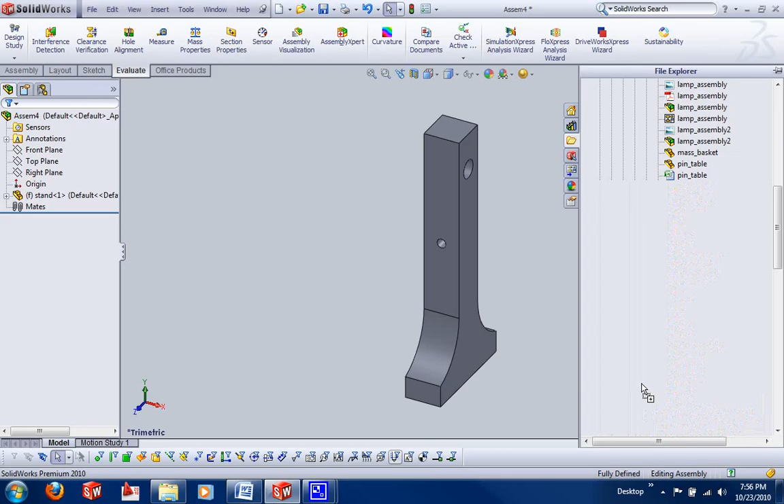I'm going to drag in the support, and I'm just going to hold control down and click and drag to get another support. I'm going to also drag in the pin table, and for the first one, I'm going to choose pin 4.

Then I'm going to hold control down, copy this over a couple times, because I'm also going to need a pin 5 and a pin 7.

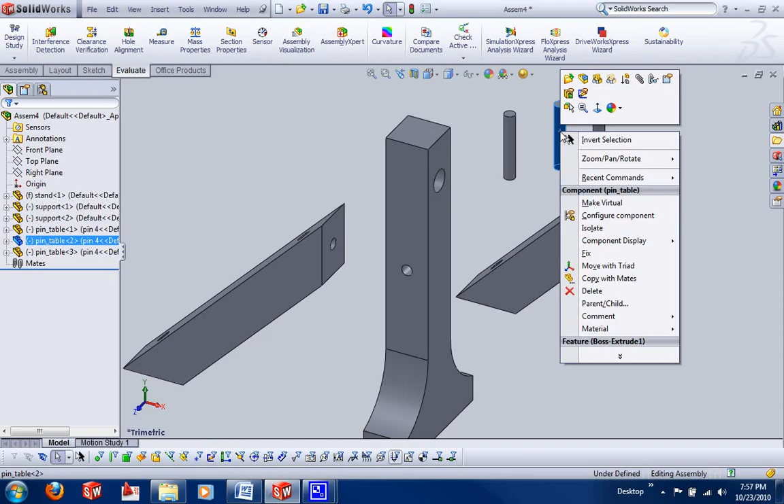So what I'm going to do is right click on the second one, go to component properties, and change this to the pin 5 configuration. I'm going to do the same for this one, but call out the pin 7.

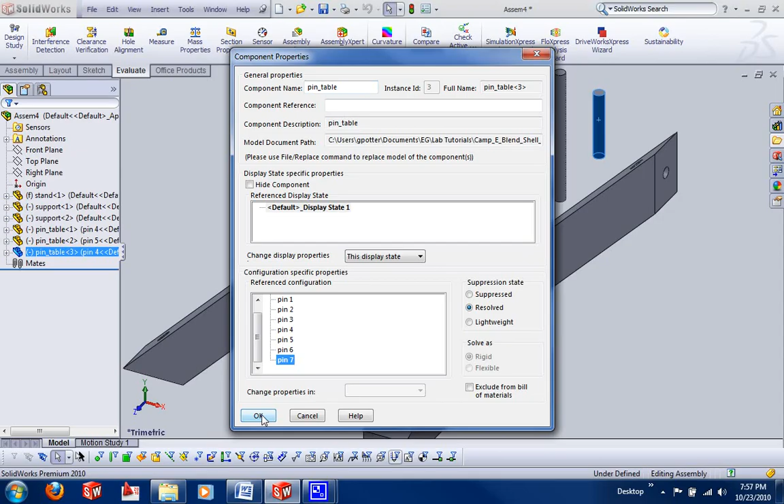So we've got 4, 5, and 7. We need 2 of 4 and 2 of 7, and I'm just using control to copy it.

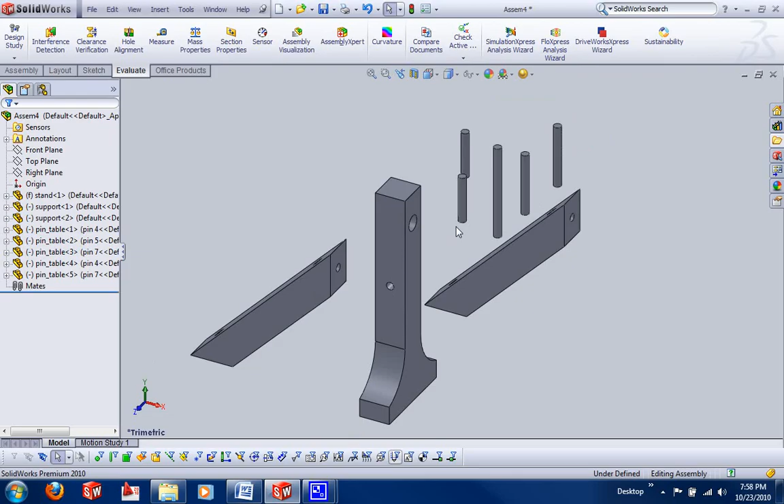Now we can start assembling everything. I assume there's some assembly knowledge you've already acquired, so all I'm doing is just mating it together.

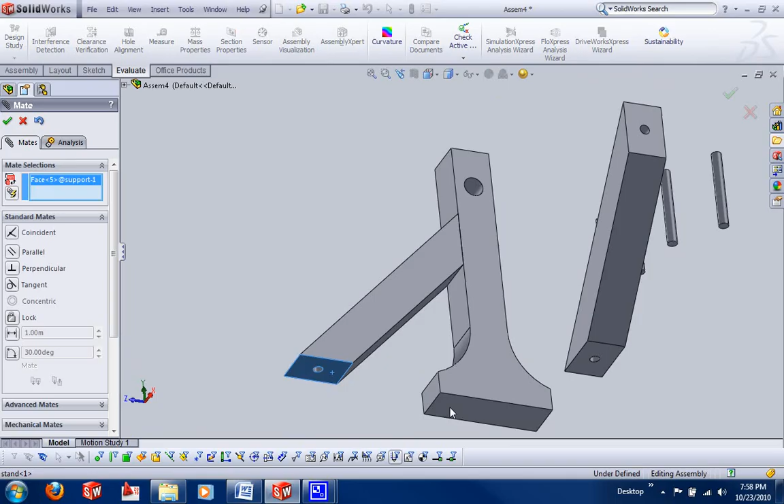These are just a lot of coincident mates, that's all it is.

Now I'm going to start putting my pins in, and I'm going to start with the long one here. I want it to be perfectly centered in there, so I'm going to go to advanced mates, and I'm going to choose width.

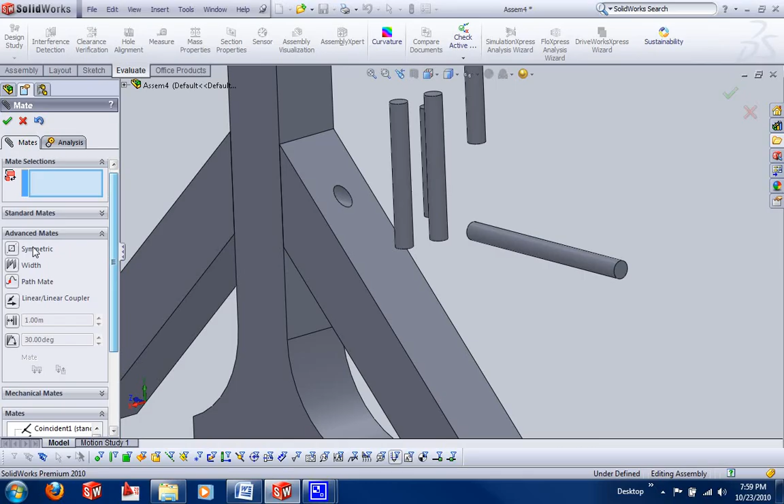I'm going to choose both ends, and then I'm going to come over here and choose both sides of the stand.

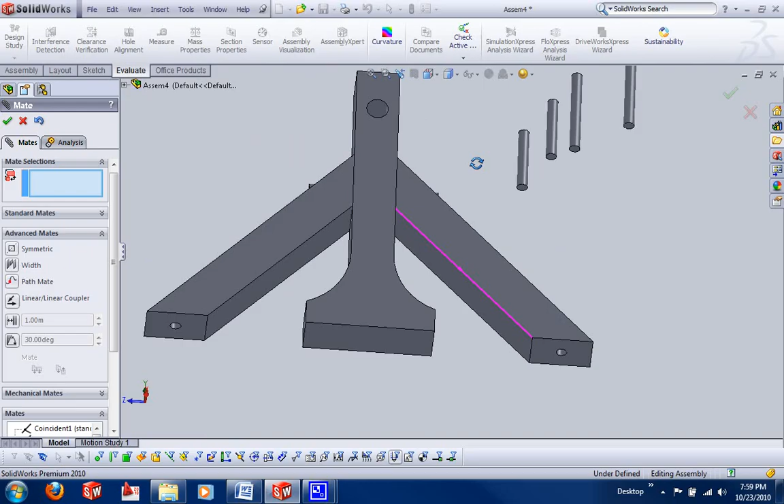Now the rest of them are going to go here. You can see I've forgotten the holes for the pins in the pivot stand.

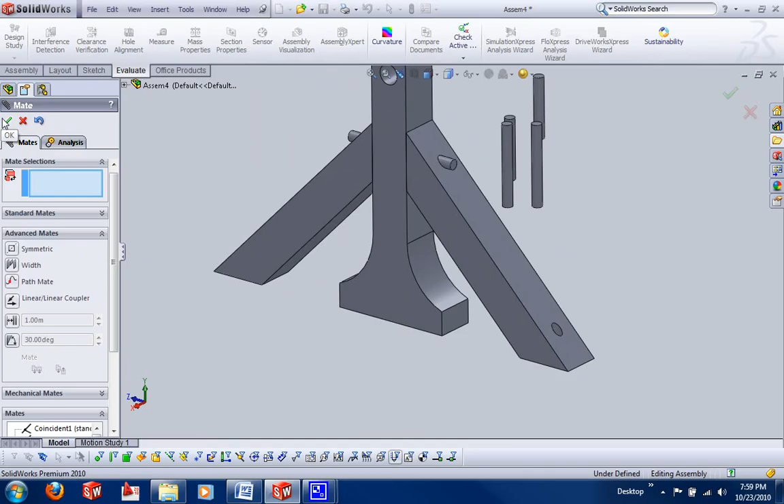So here's what we're going to do. We are going to right click the part, and we're going to say edit part, and it's asking me to save the assembly to continue, so I'll go ahead and do that.

I'll save it under Camp F, under pivot stand assembly.

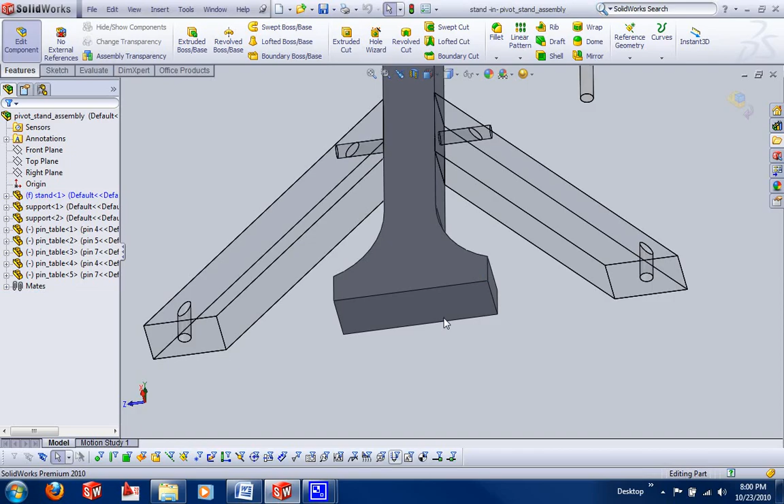So now I'm actually editing just the stand. So I can start a sketch, go normal.

Select both circles and make them equal. And just so they're centered, going to select midpoint on a center line between them.

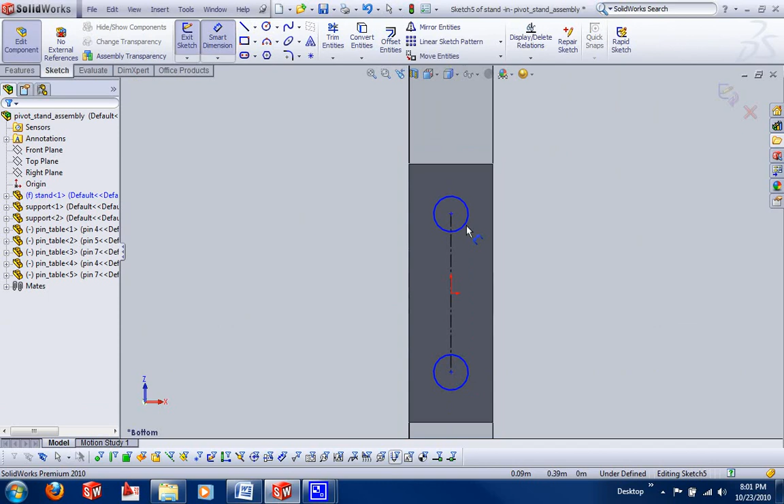I'm going to say this distance is 1 meter, and the diameter, I'm not sure of, so let's just say 0.25 for now. I don't think that's the actual diameter I need. No, let's say 0.125. Probably not, but it's...

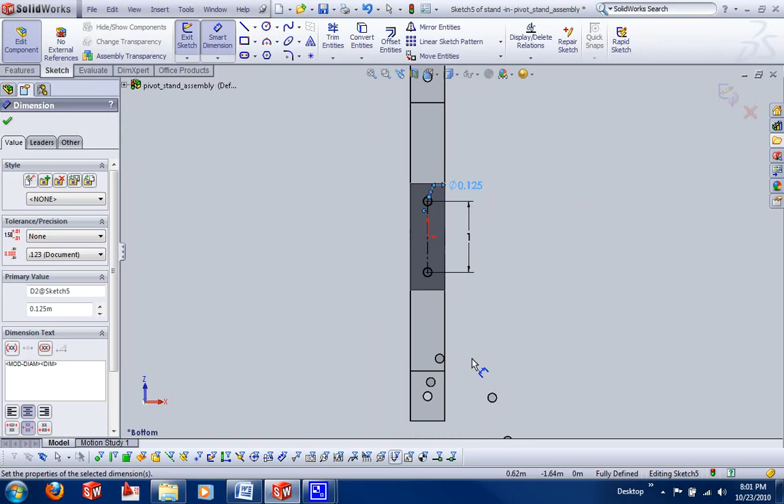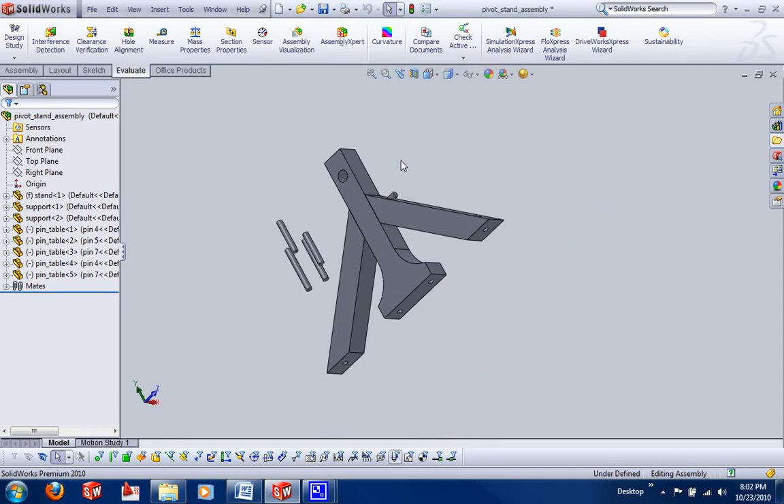Now I'm going to get out of that. I'm not sure what all that weirdness was right there, but let's measure our hole and measure our pin and see if we're the right size. So 0.125, 0.125. Alright, so we're the right size.

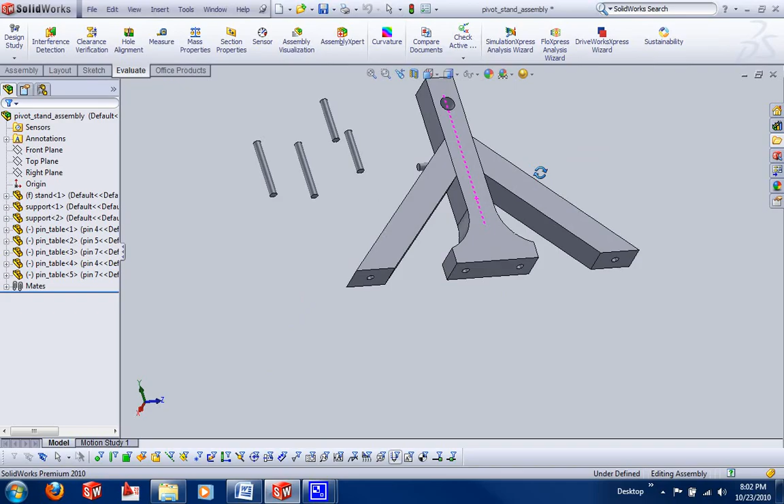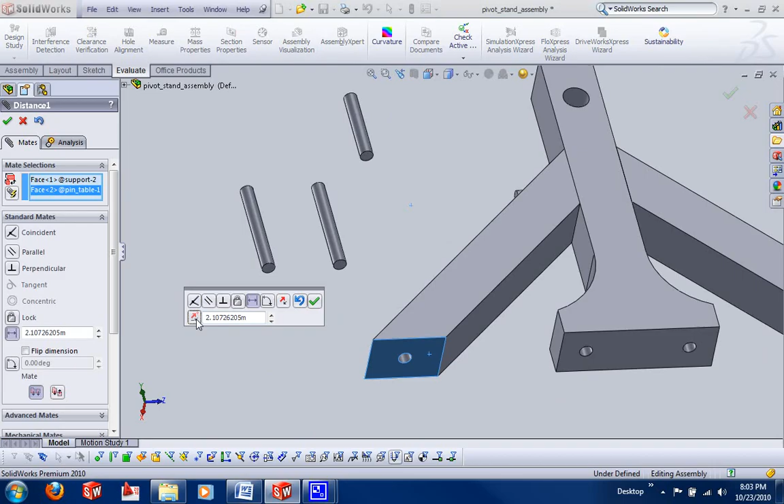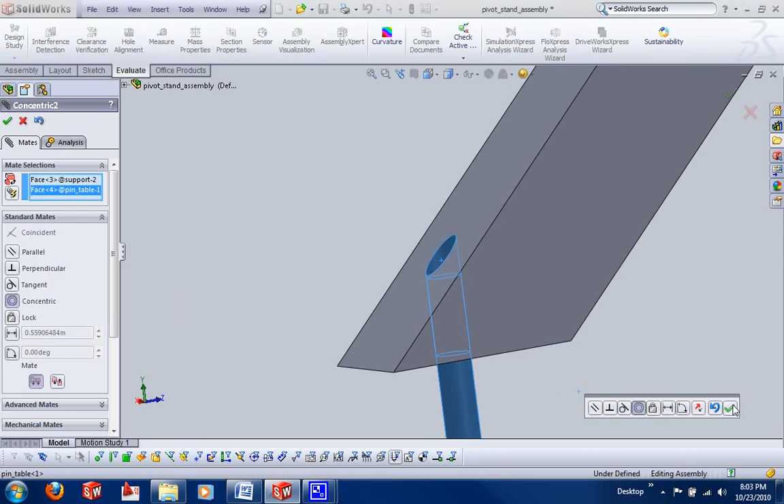Alright, so first thing we need to do is mate this into the bottom, but not coincident. We're going to say a distance in that direction. We can hit this button and it flips it. A distance of 0.475, and this distance is so that when it's made concentric here, it won't stick up through the support. You notice it ends before it comes out of the hole.

So now for the second one, all we got to do is mate it to the other one, like so, and we'll make it concentric over there, and the same for the rest of them.

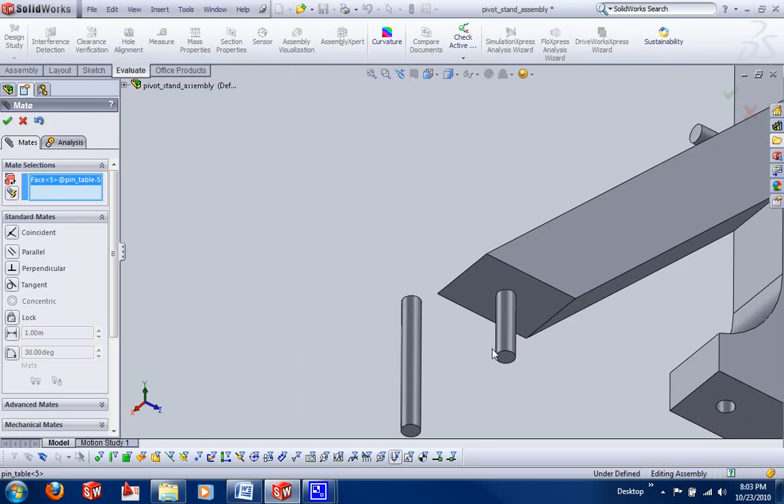And we have our pivot stand subassembly. So now I'm going to hit save. I've already named it, I'm just going to say save all of it.

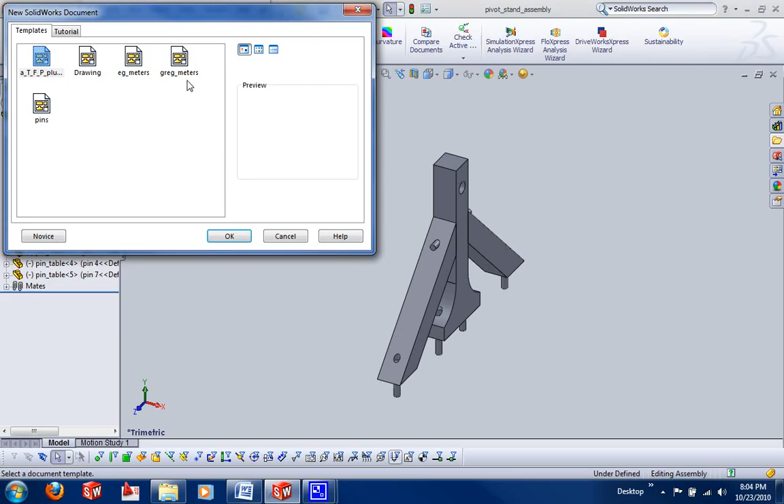Now I want to make a drawing of this. So I'm going to make a new drawing. I'm going to use EG meters, and conveniently it comes out pretty good.

What I want is an exploded view of this along with my isometric here, but I haven't created it yet.

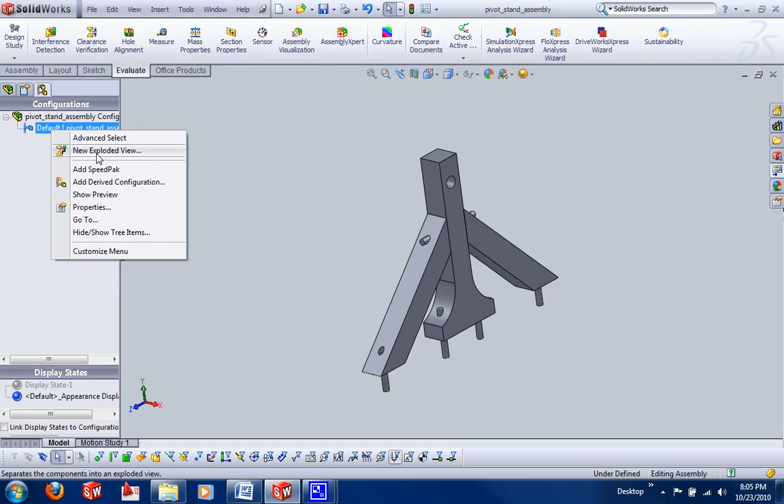So what we need to do is go back to the drawing, the assembly, and I'm going to right click and go to new exploded view, just like the house, and we are going to start by going to an isometric view, and we're going to choose the support and the pin first.

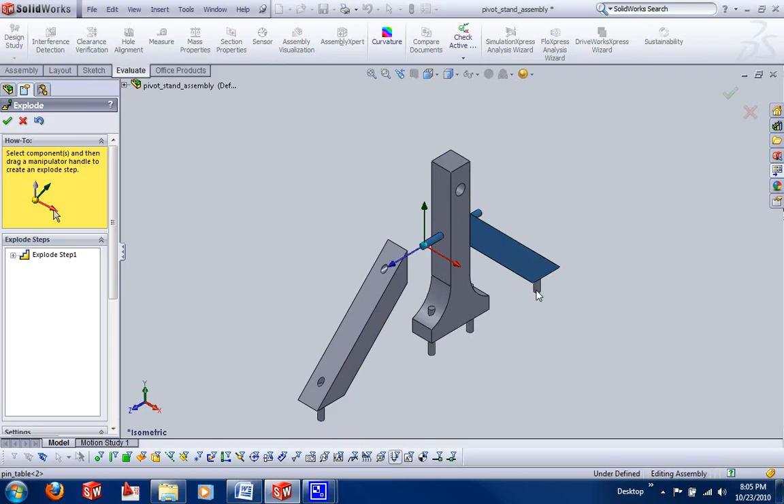I'm going to choose this pin and this pin next. And then just this pin. And then these two. And finally...

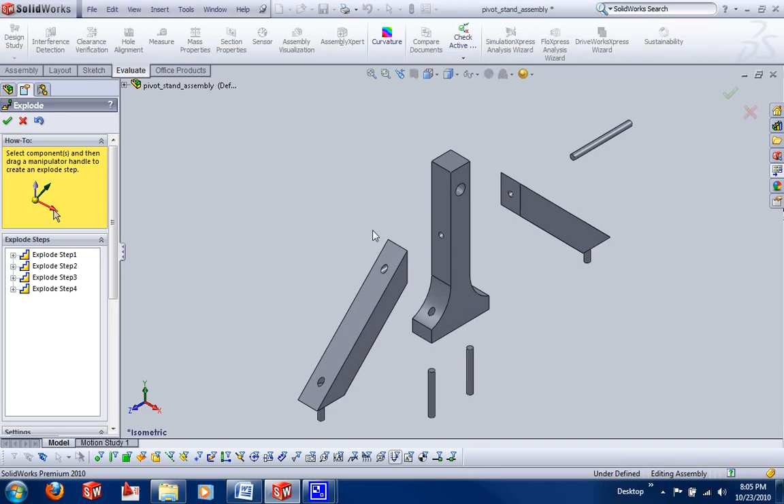Okay, so now we can hit save again and use the window menu option to go back to the drawing.

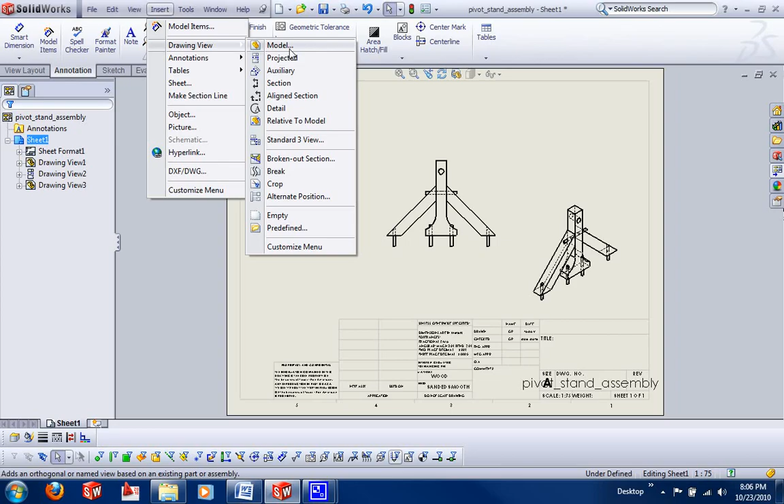And now I'm going to insert a drawing view from the model. And you can see, since it's open, it's going to give me that as a choice. So I'm going to choose isometric, place it there, and it's nice enough to already show the exploded view.

I'm going to make the size a little bit bigger. Let's say 1 to 100. Okay.

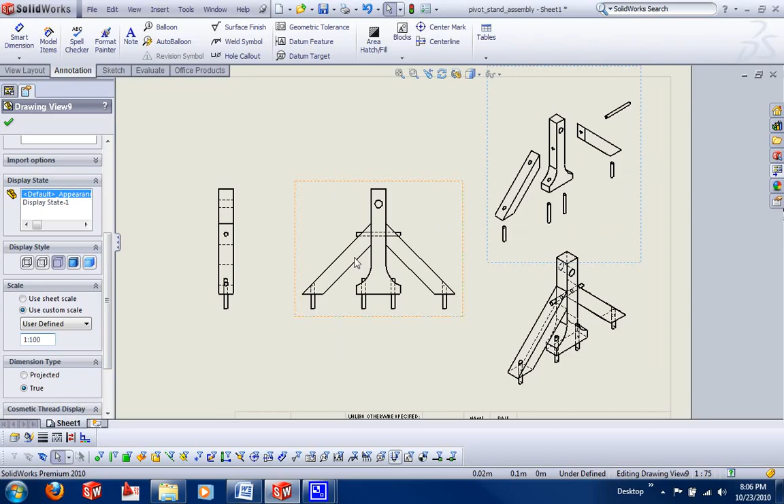So now we want our workers to know which pin to use and where, and we don't want them to have to squint their eyes to see which one is shorter, which one's longer, so it may not be so evident on later drawings. So what we want to do is create a bill of materials and then reference this drawing and point at the different parts with the reference numbers.

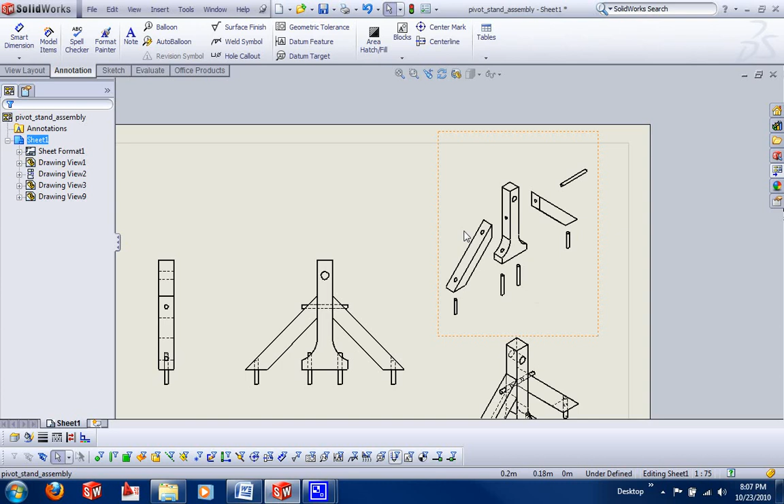So I'm going to insert table, bill of materials. And I'm going to select this drawing view, and I'm going to leave everything as it is, parts only. And here's my bill of materials.

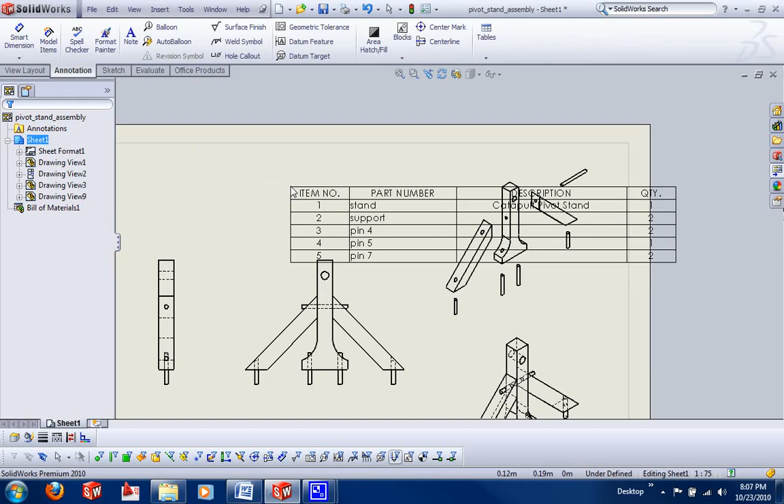Notice that if I go back and fill in a description, the description field will be filled out here. So if you want to, go ahead and do that and fill out a description for any part. You can add a description for all the parts.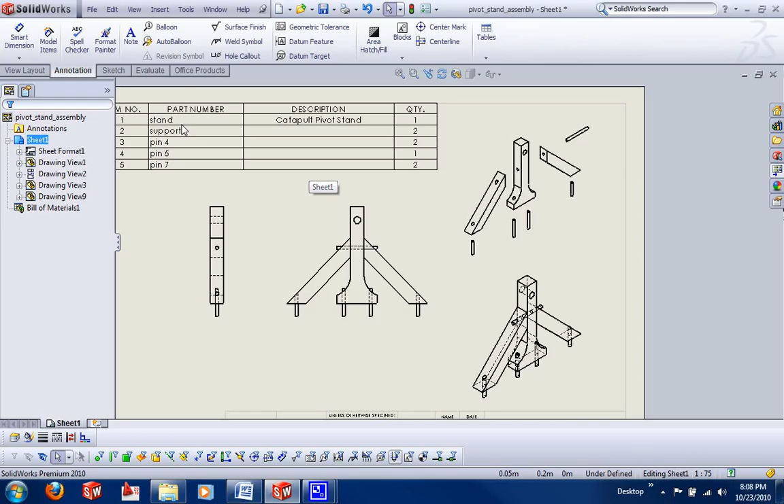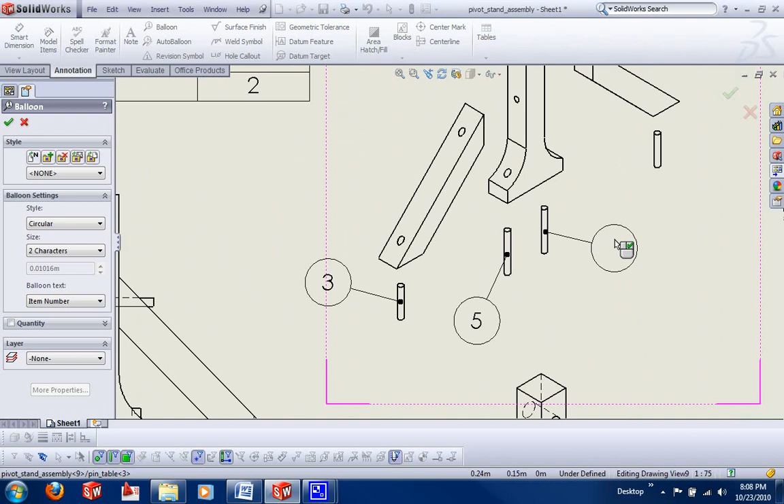And now we can actually use our balloon option to label each part. And you notice that the number corresponding with the balloon is the number in the item number column.

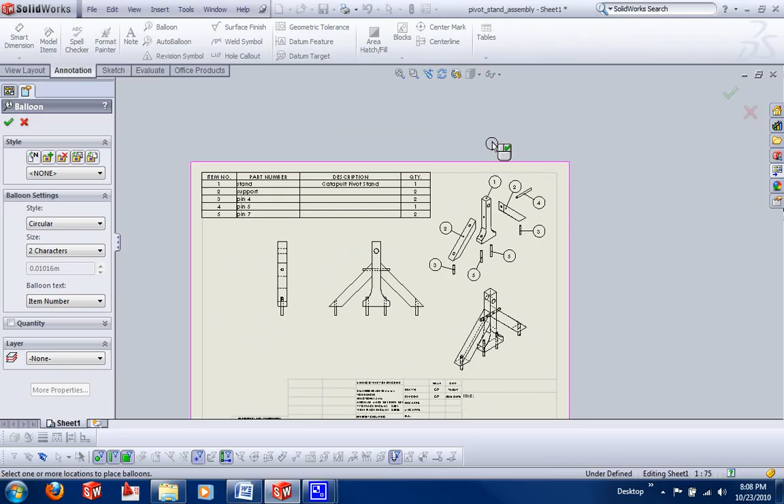Okay, so now if you notice, 1 is the stand, 2 is the support, and pin 4, 5, and 7 are 3, 4, and 5. So it's looking pretty good. Everything matches up.

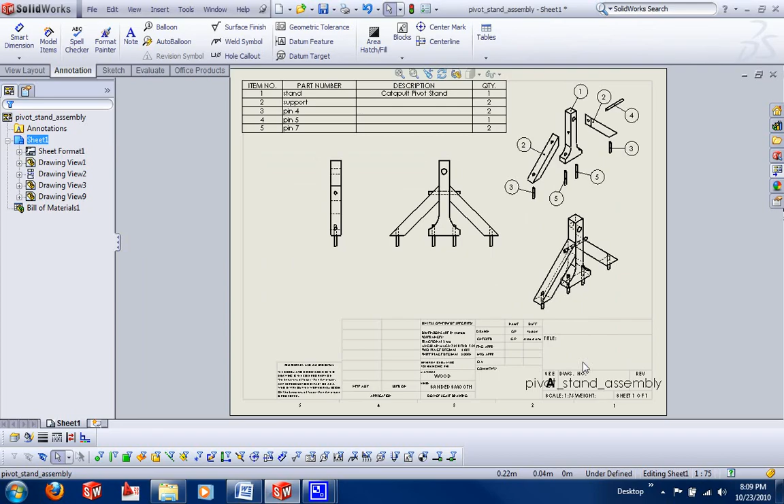We need to adjust our things over here. I want to add a description. So I'm going to come back to the assembly, and I'm going to say save as. I'm going to click down here in the add a description, and I'm going to say pivot stand subassembly.

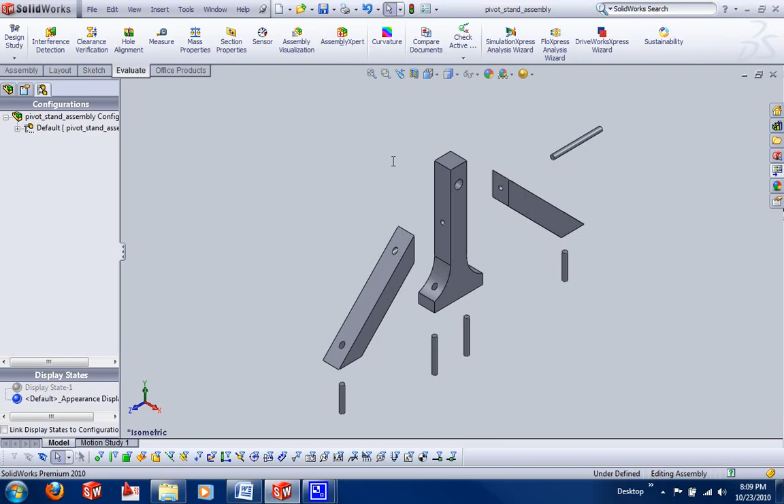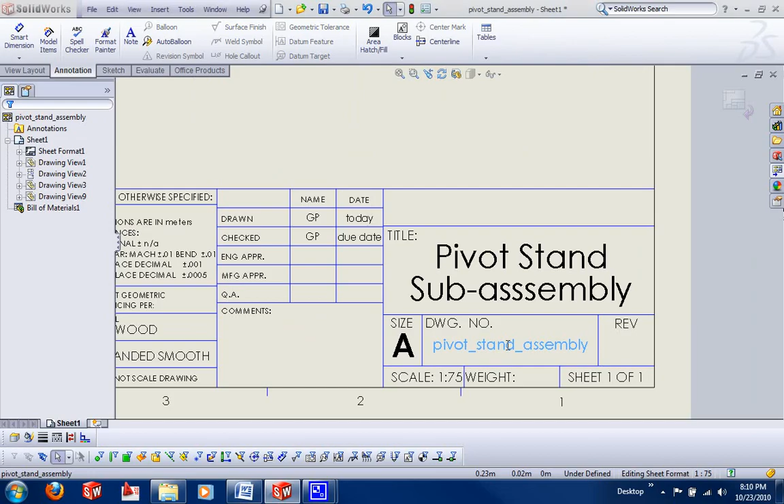And I'll go back to my drawing, refresh it, rebuild it. So now we can edit our... get back by going to edit sheet. Just going to adjust a few things here.

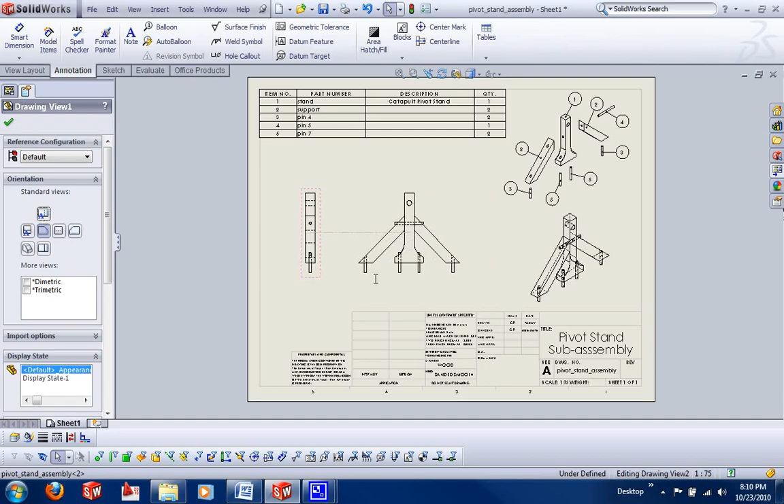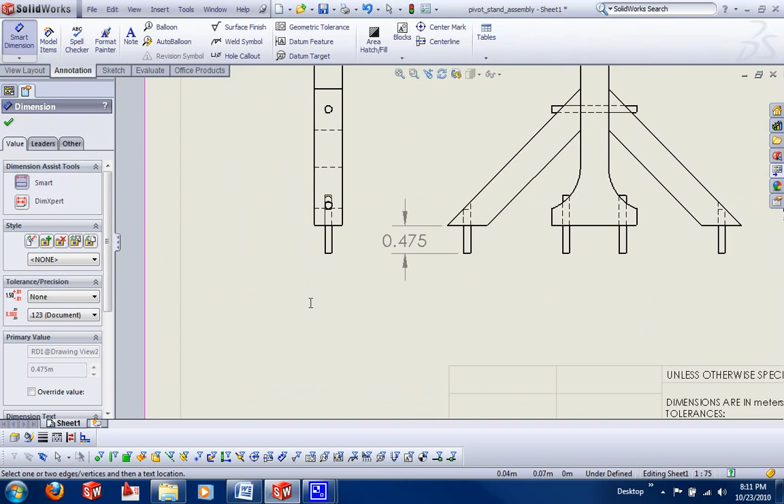Now we need to tell the workers how far these pins need to go down, so just this one dimension there will do for this subassembly. There you go. That concludes this lesson. Thank you.